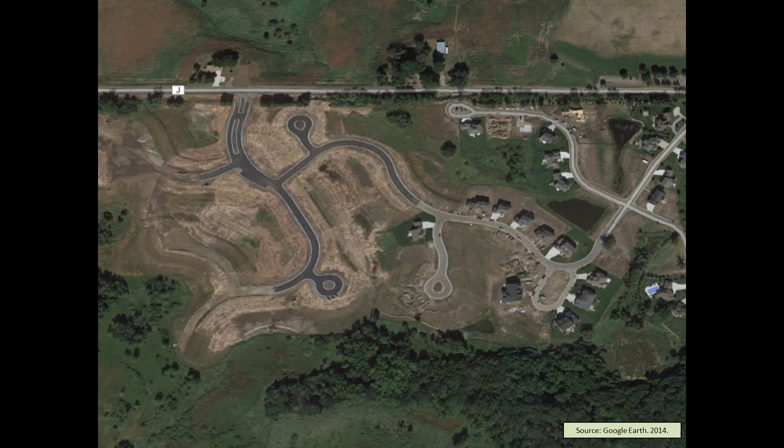So by way of introduction, the NetBlue project attempts to reconcile the issues of increasing water demand from development with a potential water scarcity situation in a community. As we know, many cities in North America are already challenged to meet customer demands for water. As drought cycles in and out of various cities across the country, it places demands not only on the existing customers, but on new development that might be anticipated.

So as our population grows and as our economy grows, arid areas in particular are suffering from intense pressure to figure out how they can sustainably grow within the confines of their existing water supply and wastewater infrastructure. And of course the consumers are weighing in as well, because as drought and water shortages are occurring and residents are under restrictions, they are raising in public forums the issue of why water is being made available for new development when they, as existing customers, are being restricted.

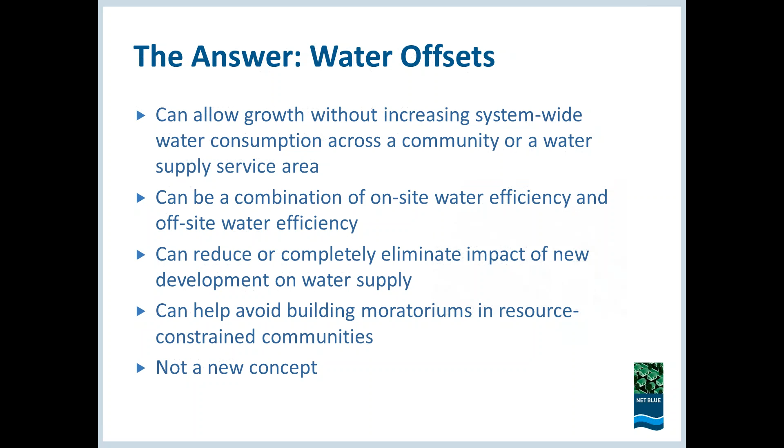But it's not really a new idea. Offsets have been used in air quality programs for at least 2 or 3 decades. They are used in wetlands mitigations, and we've seen across the country that they've been used for water supply purposes. So the first thing we did at the Alliance for Water Efficiency, and Bill Christiansen on this webinar today was the author of this report, AWE conducted some research to look at what communities had already adopted something similar in a planning and zoning ordinance.

Where were offsets already being looked at? What kind of terminology did these communities use? What documentation was provided by them? And what were some of the policies, both existing and past policies that might have been repealed? What were some of those policies, and what could we learn from them? One particular example that we looked at was Santa Fe, New Mexico. That was an example of a community that did such an offset ordinance, and so the report reviews these ordinances in detail.

And the purpose of it was to set the stage for developing a national model for how this might work in the planning and zoning environment, to develop the legal tools and the analytical tools necessary to help communities design an offset program for their use. So we came up with a program that we decided to call NetBlue, and many of you would say, well, isn't that really net zero? Isn't that what you're talking about here?

In many respects, there are lots of similarities to a net zero type program, but many net zero developments are off-grid, and we didn't ever want to imply that this program would be an off-grid development program. We mean for people to connect to water and sewer services where those services are available. What this program is attempting to do is help modulate the impact of that new development on water supply infrastructure.

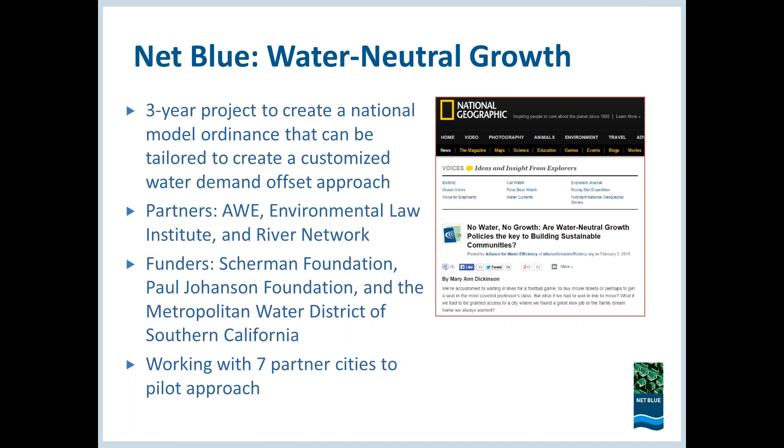We're grateful to our funders. The Scherman Foundation was the principal funder out of New York, but the Paul Johanson Foundation and the Metropolitan Water District of Southern California all provided funding. And also in providing support were 7 partner cities that worked with us over this period of time to review our drafts, to review the material that's been assembled, and to now take a look at the finished toolkits and see whether those materials are usable in their communities.

We also assembled a great group of experts who helped us on a project advisory committee. We wanted experts in planning and zoning, in the developer and builders world. We wanted water lawyers. We wanted representatives from the American Planning Association. We wanted architects who worked in sustainability and green infrastructure. We wanted municipalities, so we had the League of Cities, as well as representatives from the city itself. And we also wanted the environmental perspective, so we had Brian Richter from the Nature Conservancy. So we had leading experts in their fields advising us on the development of this program.

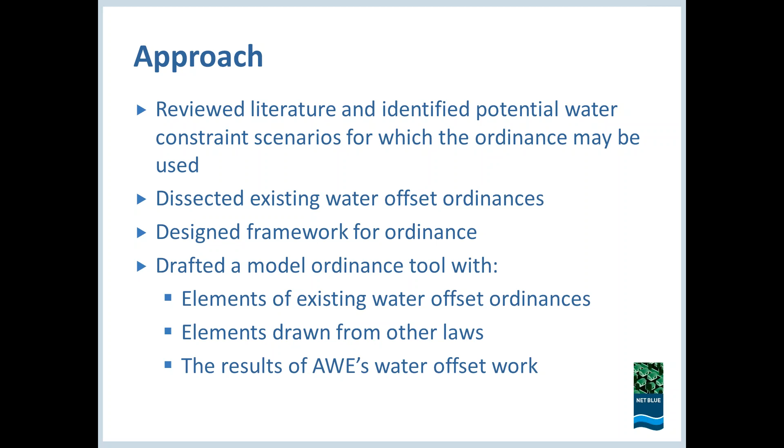In fact, if you've had a chance to look at it, you'll see that each section has a hyperlink to the ordinances that provided some of the language or concepts in that section to give you a little bit more context and hopefully allow you very quick access to see what others have done with very similar issues. But just the existing water offset ordinances were insufficient to address all of the foreseeable scenarios for which this product hopefully might be used. And we needed some glue to hold it all together. And for this, we relied on other laws for the language and structure.

Next slide. Thank you. I say all of the foreseeable scenarios, but the reality is that this tool can't address all factors. There are just too many local details, different legal, political, social, hydrologic, and other constraints. As Mary Ann mentioned, when we started this project, we knew that a traditional one-size-fits-all model ordinance wouldn't really work.

So we chose to develop a worksheet that would help users build an ordinance that is right for them. We put as many options as we could without being overwhelming, we hope, and added some explanatory language in the text boxes to sort of provide a bit of an in-worksheet guide to the different decisions that have to be made when crafting an ordinance of this nature.

The worksheet is really meant to be a start to the conversation, helping individuals of any background or role identify and think through the key issues for adopting this approach in his or her community. We expect everyone to tinker with the language even beyond the confines of the worksheet, and I'll get into that in a little bit more detail in a minute. Next slide.

So we structured the worksheet the same way that a standard ordinance would be. It starts with the legal foundation, the intent behind the adoption of the ordinance, the factual basis for adopting the ordinance, and the authority of the adopting entity to adopt the ordinance. Then came the meat of the ordinance, details regarding the requirement or incentives offered, if that's the approach chosen, the definitions, some of which are really critical to the breadth and effect of the ordinance, and I'll cover one of these in more detail in a minute, how the offset amount is determined, and the approved offset activities.

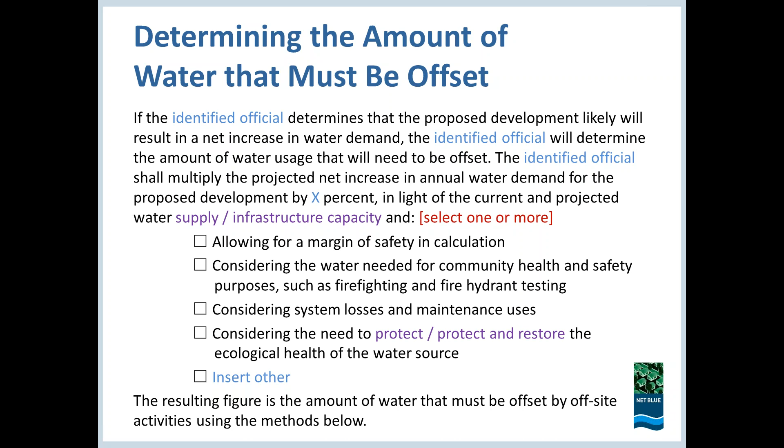So that's the legal side of the planning and zoning ordinance. What we want to show you now is how that offset would be calculated. And we'll have two speakers, Bill Christiansen and David Mitchell, talk about how the methodology workbook is structured and how you can use this workbook, whether you're a developer seeking to define what an offset might look like, or whether you're a Planning and Zoning Commission member wanting to evaluate what the offset would be for an application, or whether you're a water utility working with your community to help define those offsets. The workbook can be used for all three.

So right now I'd like to turn it over to Bill Christiansen, who will start walking us through what's in this workbook. All right, thank you, Mary Ann. So right now we're looking at the intro screen of the methodology workbook.

And you'll notice a theme throughout the workbook. Right now we see a white text box that contains information about each worksheet. And this lists all the different worksheets within the workbook, and the user can use these as links to navigate the workbook, or they can use the tabs that are found in Excel workbooks.

All right, so here we're looking at the offset strategy worksheet. And at the top of the page, you see a white text box with instructions on how to use this worksheet and what is contained in it. And one of the things it says there is that all the white cells are user inputs, and all the cells that are highlighted green on this worksheet are automatically calculated by the model.

So if we go down to step 1, which is under that text box, we'll see enter information about the new or expanded water use. And the first thing we do is assign a name. And in this case, it says example development, which is a very creative name. And then we have our projected new potable water demand entered. And in this case, it's 500,000 gallons. And the user has the option to select gallons, million gallons, acre feet, liters, or megaliters per year.

Next, the user answers some yes/no questions about rainwater harvesting or stormwater harvesting. And in this case, we have no selected for each of those cells, but we'll go into those topics a little later in this presentation. And then back to what Adam was talking about in terms of the percentage of the new demand that must be offset. In this example, we have 110%.

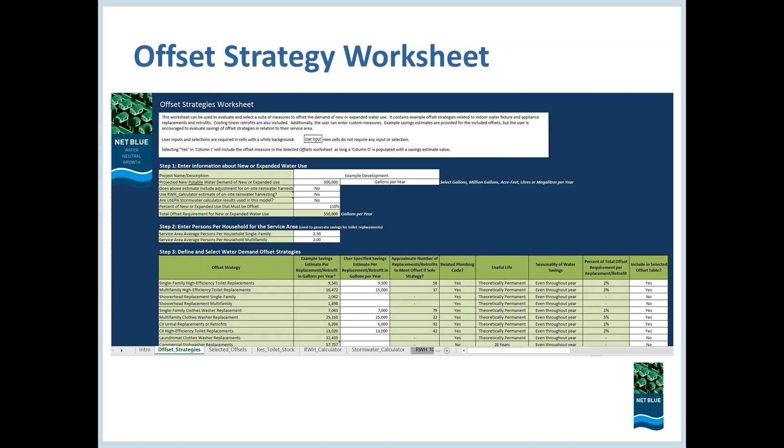And so by selecting yes, when we move to the next worksheet, so you can advance to the next slide, Mary Ann. If we select yes and have a savings value, we then move to the selected offset table, and we can click the button at the top of this worksheet that says Update Selected Offsets Table, and it'll automatically populate it based on our selections. So here we have a populated table, and under the button, of course, there's our white text box with directions and information about this worksheet.

And then we can fill out the third column, which is highlighted white as in the previous worksheet, and enter the level of activity for each strategy. So here we've got single-family toilet replacements as our first row, and we have our savings value that was brought over from the previous worksheet, and then the number to be implemented. And then the final column shows the percent of the total offset requirement that's achieved for each strategy based on those implementation values, and then whether or not we're hitting 100% as the total. And so this can be used to tally up the level of activity and determine how much of each strategy you'd like to do to meet that offset requirement.

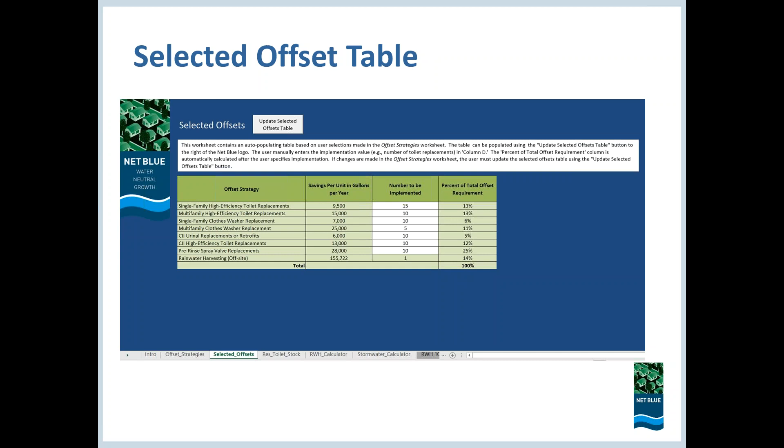So next slide, please. So we mentioned the inefficient toilet stock estimator, and this is just included as a bonus to help users evaluate how many inefficient toilets are in a service area. And by that, I mean toilets that have a 3.5 gallon per flush volume or greater. And the reason we did this is because if you can replace toilets, they tend to be at the top of the list in terms of reliability, of savings, and cost effectiveness.

So we start here by entering our current year, whether or not the community is located in California or Texas. So in California or Texas, they required 1.6 gallon per flush toilets starting in 1992, and the rest of the country, through the Energy Policy Act, those requirements went into effect in 1994. And then the user fills out some information about single-family housing units, multifamily housing units, and then the number of full and half bathrooms in single-family and multifamily housing units.

And if you don't have that information, you can click on the button to the right of those data inputs that says bathrooms per household table. And then it'll automatically bring up a table and give you that information. And then it produces at the bottom of this worksheet the estimated inefficient toilets for single-family and multifamily households. And the workbook, you can't see it, but if you scroll to the right, has some built-in data that you can use to get familiar with this worksheet.

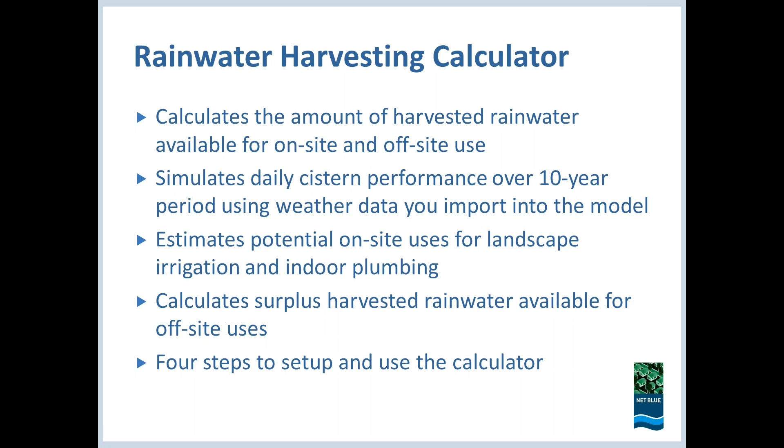And also it calculates any surplus harvested rainwater that wouldn't be used on location but could be available for use off-site. And there are 4 steps to set up and use the calculator, and I'll briefly walk you through each of those steps. Next slide.

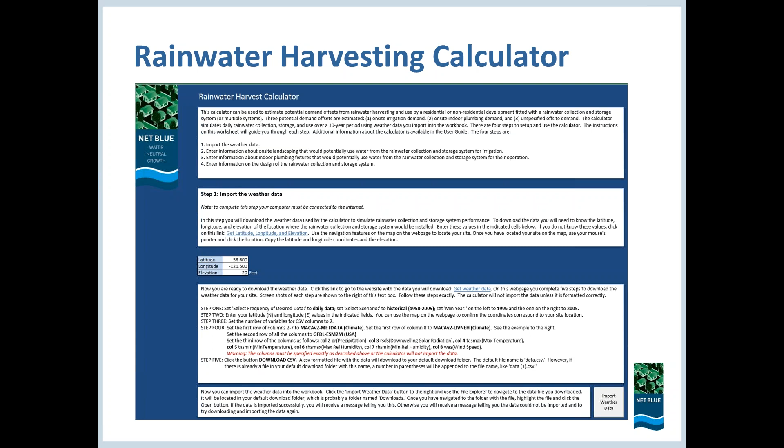So when you go to the rainwater harvesting calculator worksheet, this is what you'll be greeted with, and there's a lot of text on this slide, and most of that text is just explanation and instruction to walk you through the calculator, but it does look a little intimidating at first, and so my task here is to convince you that it's really not that hard. Let's go to the next slide and we'll start with the first step.

So the first step is to import weather data into the workbook that will be used in the simulation. And what we've done is we've linked the workbook to a website where all the data that's needed for the calculator can be gathered. And we will simply walk you through the steps at that website to be able to download a data file with all the data that you need.

And then once you've done that, you'll come back to the workbook and there'll be a button under step 1 that says import weather data, and you'll then get the familiar Windows file dialog, and you can navigate to where your data was downloaded and click the open button, and it will pull all of that data into the workbook, and that will be the completion of step 1.

Now I want to point out that this step only needs to be done once for an area where there's development. Once the weather data is imported into the workbook, you do not need to repeat this step each time you want to use the calculator, unless you were to want to use the calculator for an entirely different region where that weather would no longer be applicable. Let's go to the next slide.

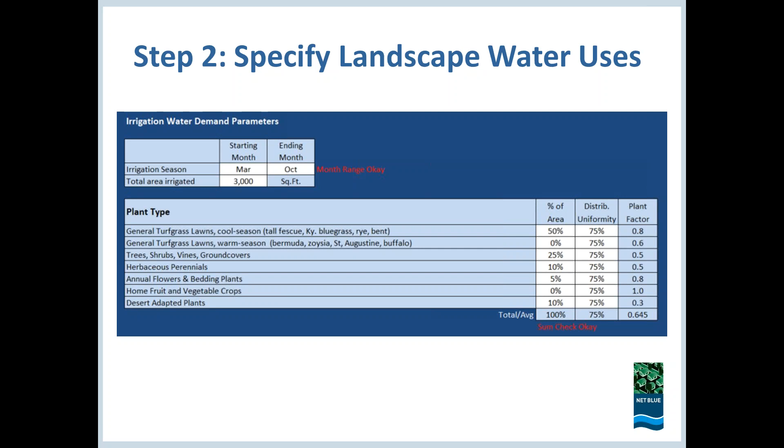The user can also set the distribution uniformity for the irrigation system, which determines how much water needs to be applied to get effective irrigation. We include a standard value of 75%, and then in the user guide we discuss how that value could be modified if the user chose to do so. Once you've completed this step, you've set the calculator up to be able to simulate landscape irrigation water demand for that 10-year simulation period. Let's go to step 3.

So in step 3, you have an option to simulate indoor uses of harvested rainwater. This is not required. If that was not something that would be done with the system, then the user can select none at the top where it says select type of site. And in that case, you would do nothing further. You would just move on to the next step.

But if you were intending to use the harvested rainwater for indoor plumbing purposes, then you would indicate first what type of site the system is being installed in. In this example, we selected residential, but you can also select different types of commercial sites. But I'll work through this example with residential.

The next thing you need to do is indicate the average persons per household, and as Bill indicated previously, when you set up the offset workbook to begin with, you have already developed that estimate, and so you would just carry it into this part of the workbook. Then you just indicate for the calculator whether the harvested rainwater would be used for toilets or clothes washers, and you can pick one or the other or both.

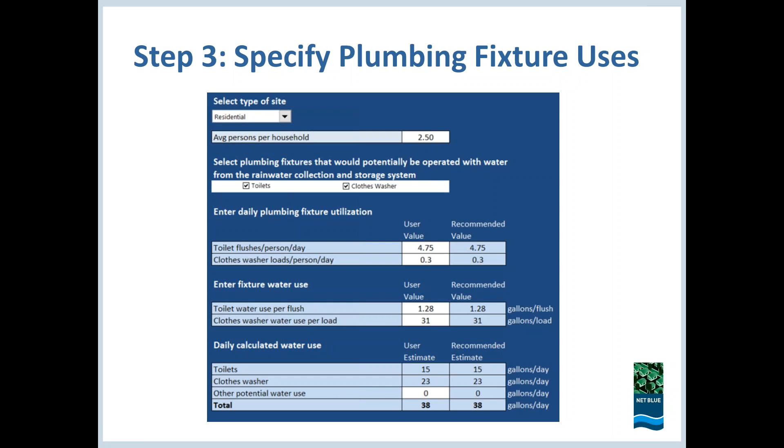And then lastly, if you look at this last table on the slide, above the total line, there is other potential water use. So if there is some other potential indoor water use that we have not accounted for, other than toilet or clothes washer, you can enter in the daily expected demand for that other potential use, just to give you a little bit more flexibility. Let's go to the last step.

So now you've set up the calculator so it can simulate your outdoor landscape irrigation demands and your indoor plumbing demands that could be potentially met with harvested rainwater. So the last step is to tell the calculator what are the design characteristics of your harvested rainwater system or your cistern.

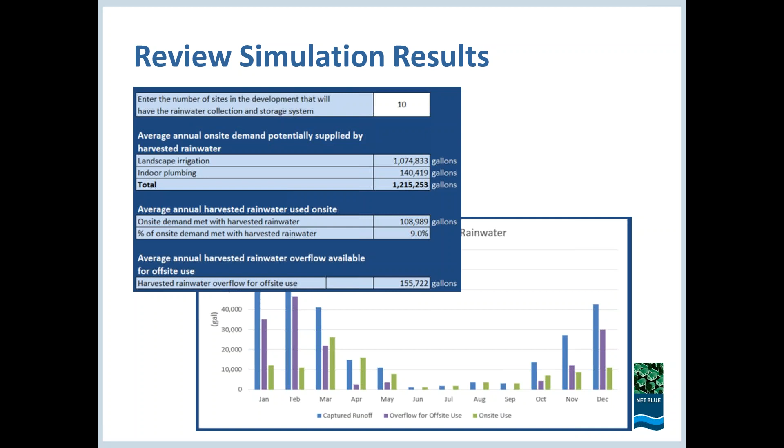So that's the rainwater harvest calculator, and I'll now pass back to Bill so he can talk about the stormwater calculator. All right, thank you, David.

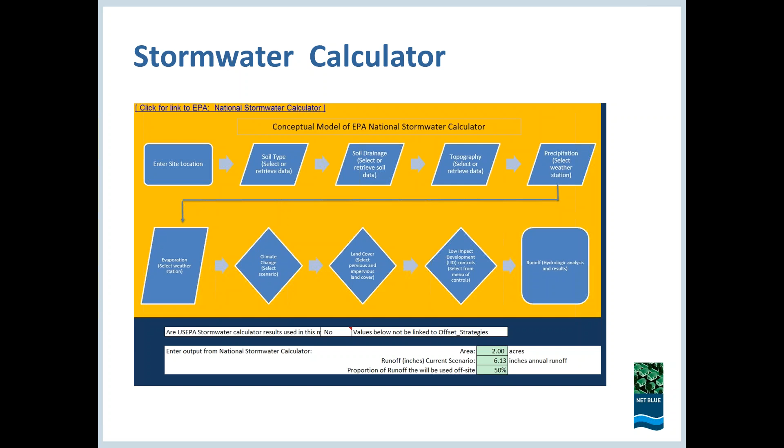Thank you. Okay, thank you very much, David and Bill, for that great discussion of the methodology calculator.

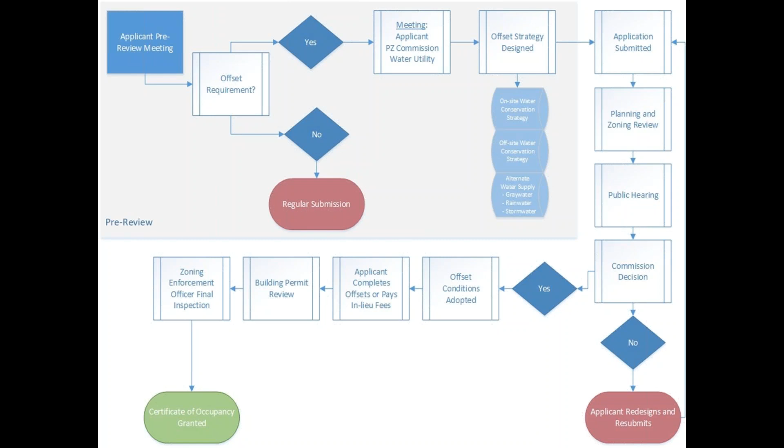This is also available on our website, which I'll show you. But it's just a stylized diagram of how the whole planning and zoning process would work if an overlay ordinance for offsets is adopted. We also have 3 examples that we've put together for you, to show you the diversity of options of how the ordinance could work and how the methodology for the offsets could work together. Each one of those 3 examples are different, but they all come from the same source materials of the toolkit.

One of the reasons we wanted to show you some examples is that in many cases an offset is not likely to be a very onerous requirement. It might be some very simple retrofits that will yield the amount of water required. But we know that the devil's in the detail, so we wanted to show you some quick examples and also stress that there are user guides available for all of this. There's a user guide for the model ordinance worksheet, and a user guide for the offset methodology. So you will have written materials to help work you through what you've been hearing about today.

So very quickly, I wanted Adam and Bill to go through the offset examples. Adam will talk about the ordinance, and then Bill will talk about the offset.

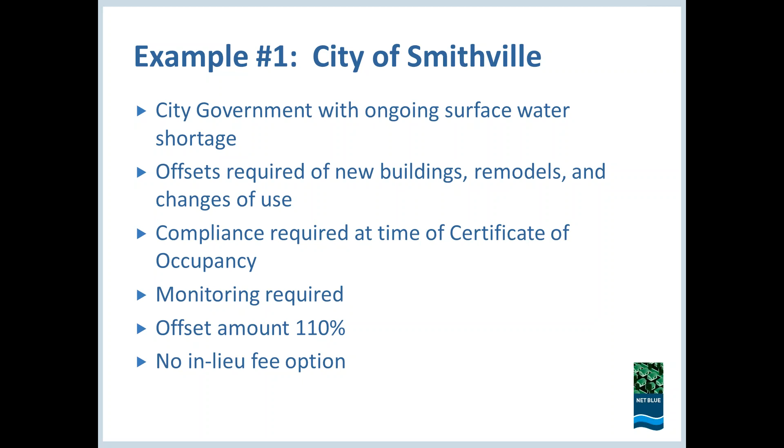Thanks, Marianne. So this is the most robust of the 3 examples, requiring over 100% offset of the projected net increase in annual water demand, requiring monitoring after occupancy, and applying to new buildings, remodels, as well as changes of use. In this example, the ordinance was adopted by city government. The source of water at issue is surface water, and the problem being addressed is frequent water shortages. Bill?

Yeah, next slide, please. So we created an example of a new development and example offsets to provide users an example of how to use the workbook. For this, we had a development of 5 single-family dwelling units, and the projected annual water demand is 500,000 gallons. As Adam mentioned, the required offset amount is 110%, so 550,000 gallons per year. The offset strategy selected would be single-family toilet replacements of 3.5 gallons per flush or higher with WaterSense toilets at 1.28 gallons per flush.

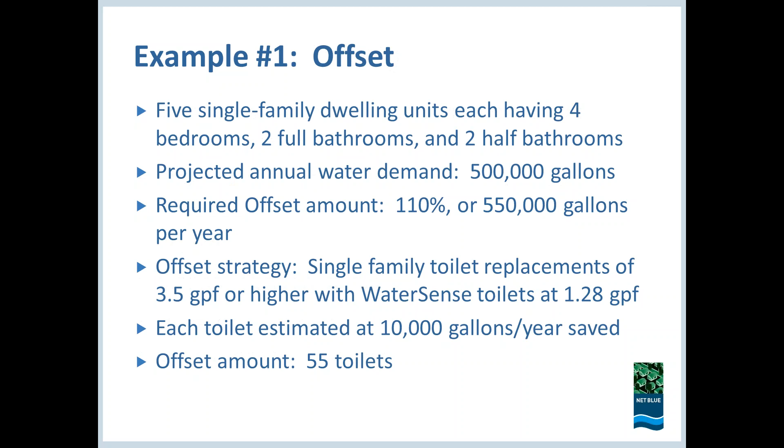So the estimate for each toilet savings would be 10,000 gallons per year for this service area, and then they could achieve the offset with 55 single-family toilet replacements. We walk you through that exercise in the document and show screen captures of the workbook.

So the second example, by the way, these are all available on the website. The second example is the most basic of the 3, offering incentives to offset the projected net increase in annual water demand rather than requiring it. To be eligible for those incentives, only 75% of the projected demand increase needed to be offset, and water use monitoring after occupancy is not expected. In this example, the ordinance was adopted by county government to address a mounting saltwater intrusion problem to their groundwater resources, and an in lieu fee option is included. Bill?

All right, so for this example, we have a new development that's a multi-unit office building with a projected annual water demand of 5.8 acre feet. If you don't think in acre feet, that's 1.9 million gallons. And the offset amount of 75% is 4.35 acre feet. The offset strategy here is various retrofits of commercial facilities as identified by the local water utility.

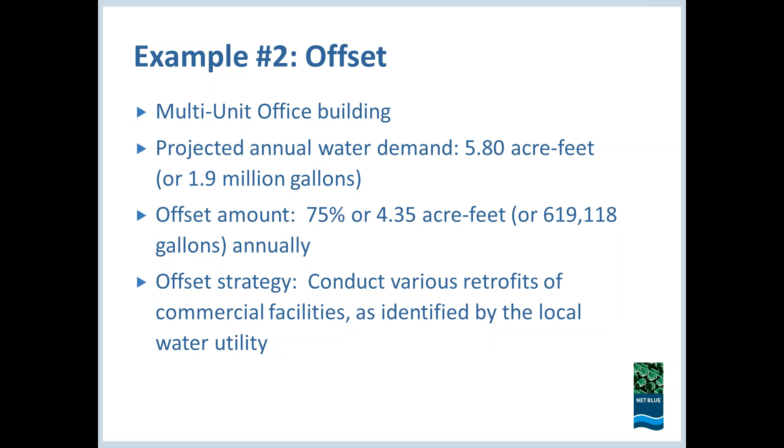So if you could go to the next slide, we can look at those examples. So here the water utility reached out to commercial customers and found 8 restaurants that would replace their pre-rinse spray valves, 2 that would replace dishwashers and food steamers. And then they were able to find a laundromat that would replace 6 clothes washers. They also found 1 office building that would replace 8 urinals, and then they found 30 single-family homes and 30 multifamily housing units that would replace their toilets. So they had a suite of measures, and that's all included in the example.

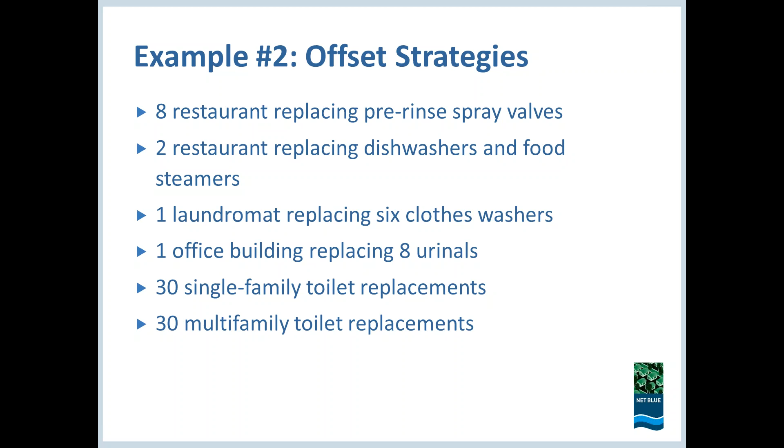All right, so for the offset example here, we mixed it up a little bit. We have a new beer brewery in the service area, and their projected annual water demand is 1.75 million gallons per year. They have a rainwater harvesting system that meets nearly 100% of their toilet flushing needs. So it brought down their water demand quite a bit to 1.7 in the example.

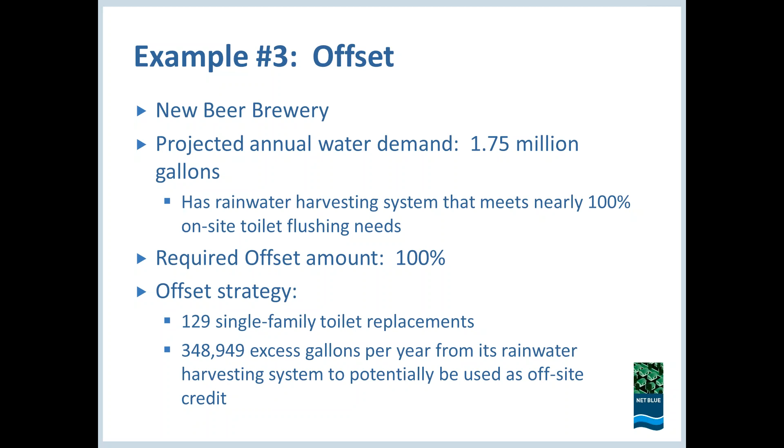And in terms of the offset strategies, they decided they would go forward with 129 single-family toilet replacements, but their rainwater system actually produces an excess of water, nearly 350,000 gallons, and they're going to try to work with a neighboring customer of the utility to potentially use that as an offset as well. So they'll divert that water captured in their rainwater harvesting system to another customer and theoretically offset that water use. So that example walks you through the use of the rainwater harvesting calculator as well.

So just to conclude, we came up with this project because water and growth we feel are very integrally linked. We want to make sure that new development has the water it needs and that the community has an investment in both the water supply and the development in that linked regard. And we want to make sure that water supply planners and planning and zoning administrators and land use planners talk to each other. They have been in separate silos for many years. We're hoping to pull them together on a more active basis with this program.

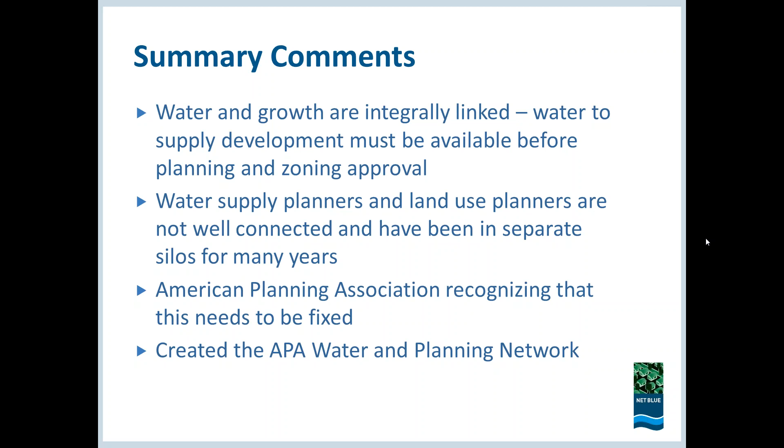And we're also active with the American Planning Association, who is recognizing that this water and land use connection is important and needs to be fixed. And there is now an APA Water and Planning Network, which you are welcome to join. I don't even think you have to be an APA member to join the LinkedIn network, but a lot of these issues will be discussed going forward.